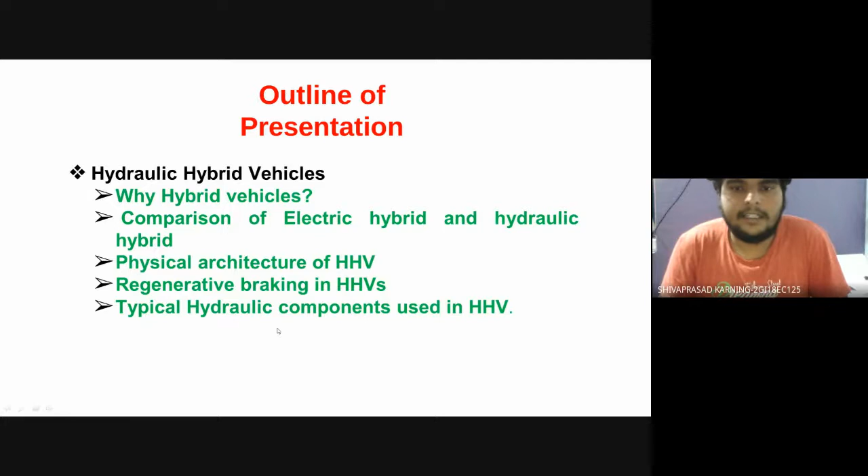Good afternoon, everyone. Our group number is 67. So we are going to present on special hybrid vehicles. Myself, Shivaprasad and Shreekrishna Goud are going to present it. This is the outline of our presentation. Hydraulic hybrid vehicles. We will be seeing why hybrid vehicles and the comparison of electric hybrid and hydraulic hybrid. In physical architecture of HHVs, we will be seeing the working of hydraulic hybrid truck and regenerative braking in HHVs, and we'll be seeing some typical hydraulic components used in HHVs.

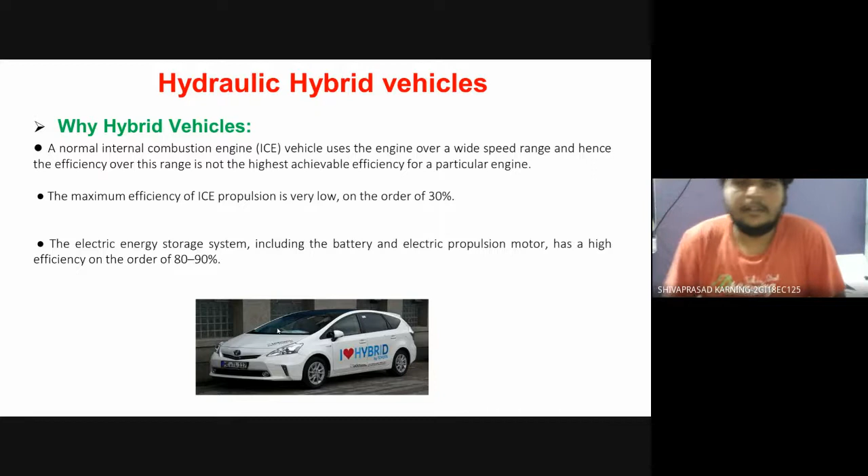So first, why hybrid vehicles? There are few reasons we are going to choose hybrid vehicles. Some of them are in ICE engine vehicles. The vehicle uses the engine over wide speed range, so the efficiency over this range is not the highest achievable efficiency for a particular engine. The maximum efficiency of ICE propulsion in the act of driving is very low, in the order of 30%. In the battery and the electric propulsion motor, the electric storage system has a high efficiency in the order of 80 to 90%.

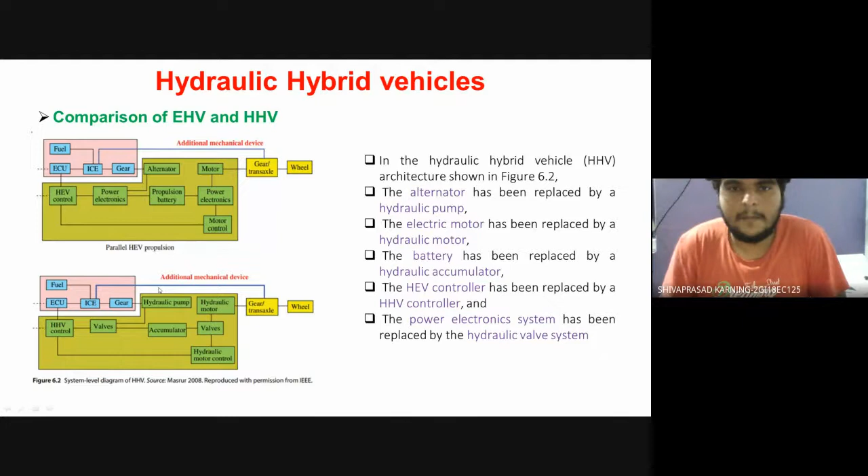Now coming to the physical architecture of HHV, as you can see, this is a diagram of a hydraulic hybrid truck.

Hello, sir, can you hear me? Yeah, you are audible. You are perfectly audible. If there is any problem, I'll let your partner know. Yes, yes, sir. Thank you.

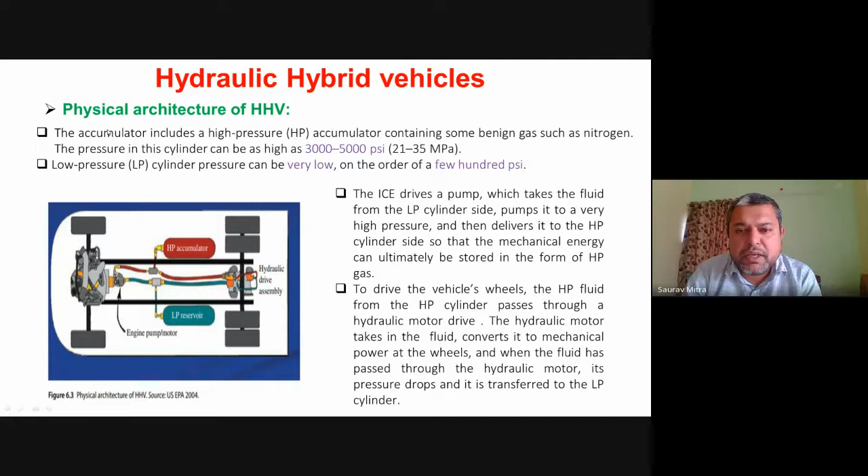Yeah, that slide, that's 6.3. Shivaprasad, I suggest that whatever images are there below, 6.3 and all, that is the book figure number. Okay, so you change that. That part you cut, or you give the number of your presentation. So this is the first image we are seeing, so you give number as figure 1. Yes, sir. And in theory also, if it is mentioned 6.3, you change it as figure 1 and give number. So before you are uploading, please do these corrections. Yeah, please explain. You are explaining very properly. Explain this figure. Yes.

This is a picture of a hydraulic hybrid truck, where you can see an accumulator and reservoir. This accumulator is named as HP accumulator because this contains high pressured gas, mainly inert gas such as nitrogen, and the reservoir, which can also be called a tank, has the low pressured gas stored in it. So coming to the movement of the wheels, when the acceleration pedal is pressed, the high pressure gas in the accumulator pushes the fluid to the hydraulic motor, where it converts to mechanical power so that the wheels can move, and the pressurized fluid is transferred to the LP reservoir where it is stored.

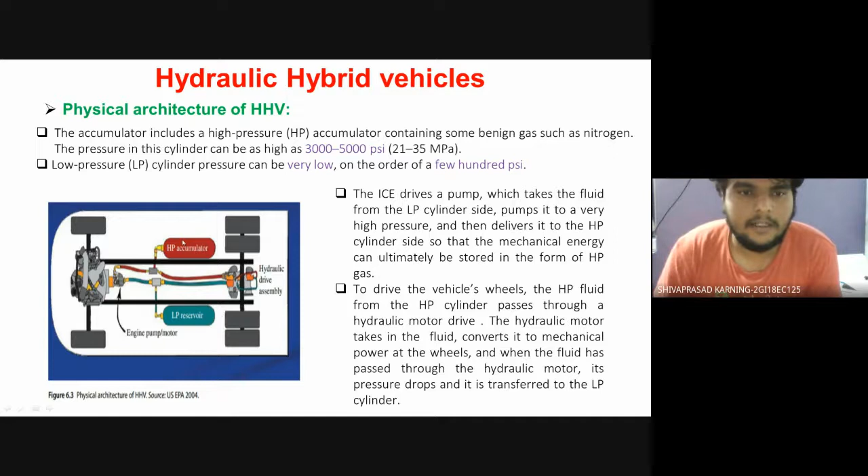When the brake pedal is pressed, the low pressured gas present in the reservoir is pressurized by the kinetic energy of the truck and transferred to the HP accumulator, where the level of gas present moves up, and the same process is carried out again when the acceleration pedal is pressed.

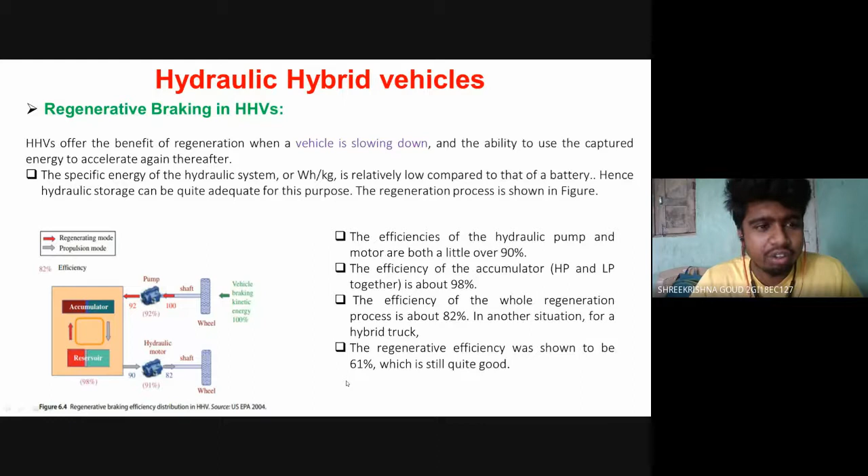Good afternoon, sir. My name is Shreekrishna, and I am going to explain you about the regenerative braking in HHV. Turn on your video first. Yes, sir. Is it? Yeah, I can view you. Correct, please proceed, explain.

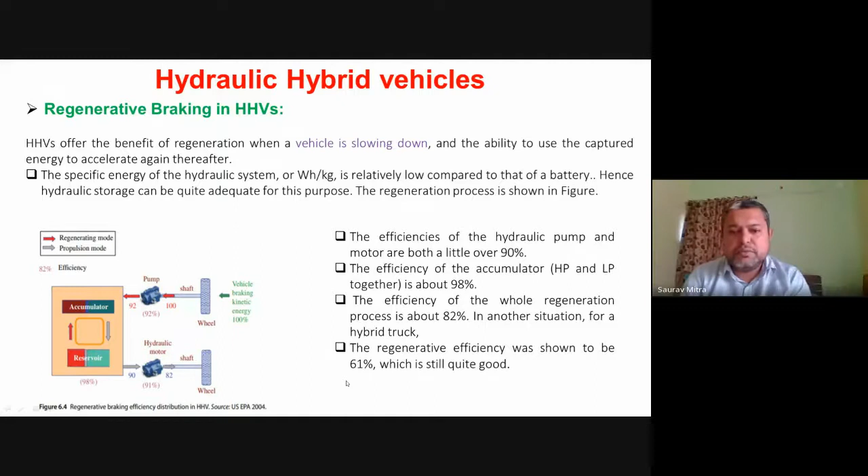HHVs offer the benefit of regeneration when a vehicle is slowing down, and the ability to use the captured energy to accelerate again thereafter. The specific energy of the hydraulic system, or watt-hours per kg, is relatively low compared to that of the battery. Hence, the hydraulic storage can be quite adequate for this purpose.

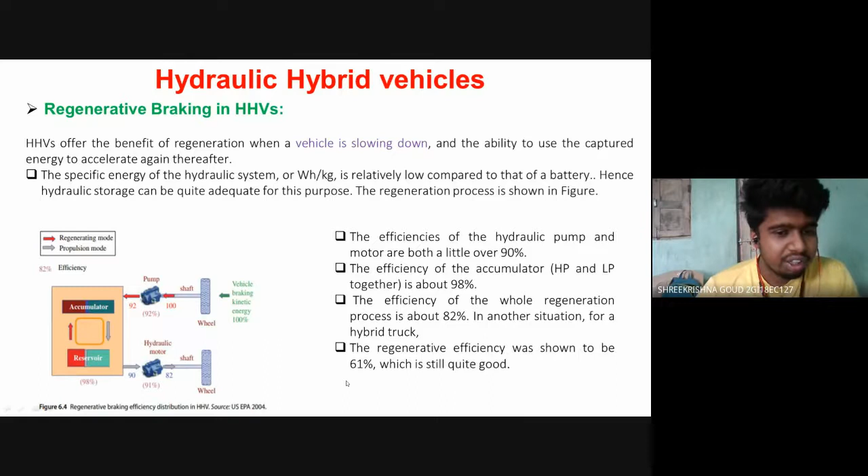The regeneration process is shown in the figure. We can see that the efficiencies of the hydraulic motor and pump are just greater than about 90%, and the accumulators and reservoirs, which are high pressure and low pressure, have efficiencies of about 98%. The whole regeneration process is about 82% efficient theoretically, but in practice for a hybrid truck it is about 61%, which is still good for the regenerative process.

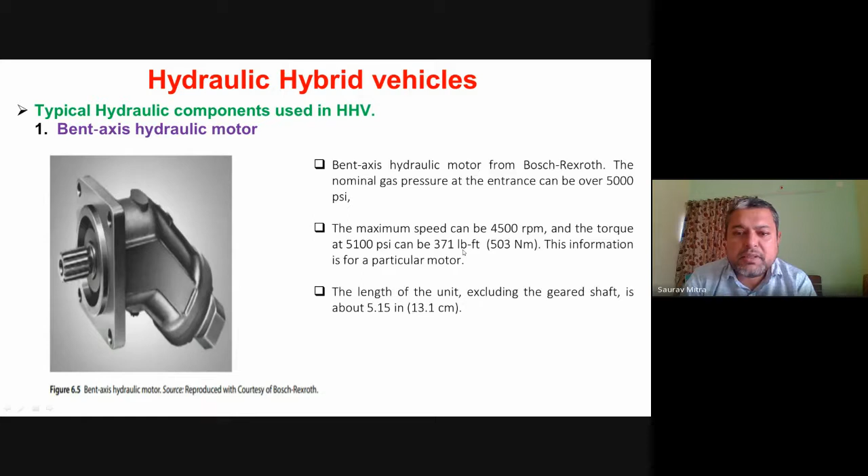This information is only for the particular motor. The length of the unit, excluding the geared shaft, is about 5.15 inches.

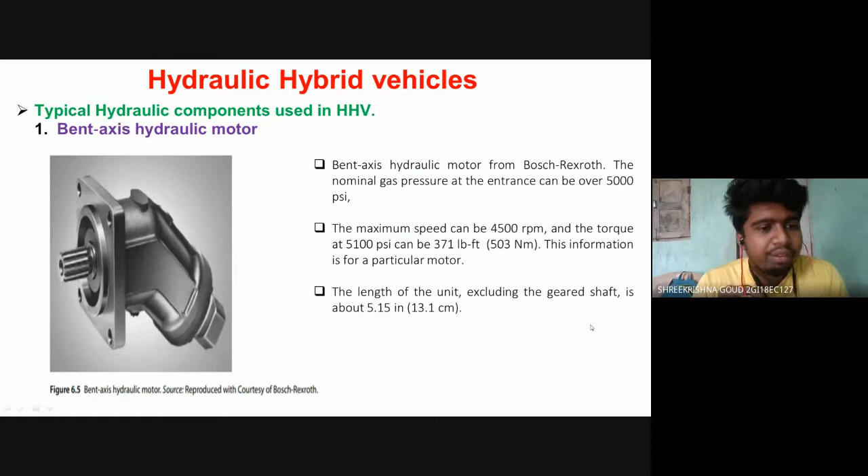The hydraulic pumps also have similar appearance and characteristics, along with bladder and diaphragm accumulators. There are other accumulators which are merely cylinders with valves that let the gas in or out, with some appropriate safety mechanisms. Bladder and diaphragm accumulators are one type of that.

In this, the diaphragm is pushed by the liquid from the bottom, when the gas changes the volume of the gas in the upper part, that is between the diaphragm and the outer cylinder itself.

The diagram on the left shows the bladder accumulator, where the bladder contains the gas which can be compressed. When the fluid enters the cylinder from the bottom, the bladder can expand or contract. Thus energy is stored when the bladder contracts, and energy is released when the bladder expands. Thus the energy is transferred through the fluid.

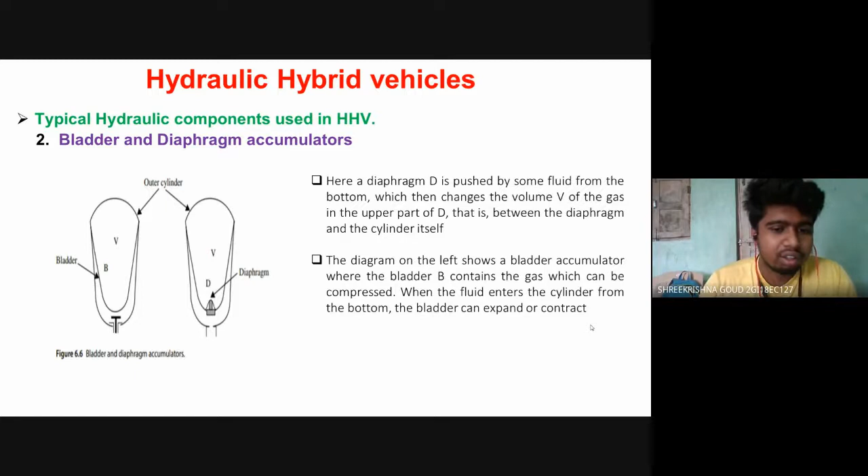So what is the main difference between HHV and EHV?

Sir, we can use this for hydraulic. Hydraulic means using gas, and by using electricity, efficiency is less than hydraulic braking system, sir. Sir, in HVs, IC engine is used, and in HHVs it is driven by fluid.

Any specific application of HHV? Same only, sir, for transportation. It's also seen in JCB and all. Yes sir, hydraulic, that is the best example of HHV.

That is the best example of hydraulic power transmission. So whenever huge amount of power is required, the truck's back part tilts over like that. These big steel cylinders are there, and the piston moves up and down like that. So they are the best examples of hydraulic.

So there are actually three power sources. One is electrical or electronic, you can say. Electronic is used very rarely. So electrical, then pneumatic, and then hydraulic.

So electrical has the highest precision, perfect timing, perfect amount of energy, all these things. If you want that, in that case we want electrical. But electrical cannot give us very high power or high power density. So mainly for perfection, for very small amounts of power wherever required, we use electrical.